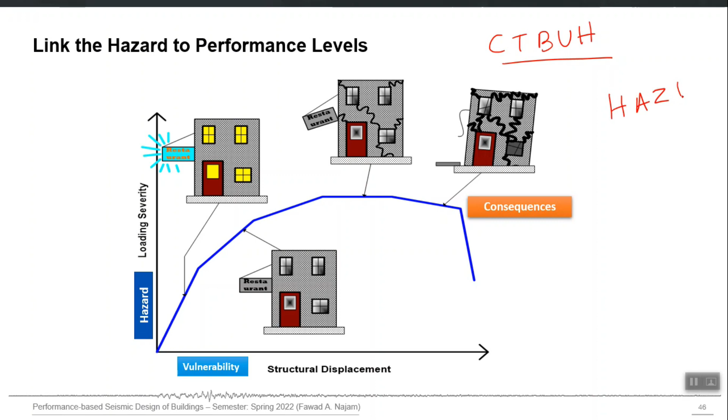You specifically mentioned HAZUS. HAZUS is a methodology and a tool to perform seismic loss estimation. Seismic loss estimation itself is a big area. Loss estimation means that, for example, if you create a particular earthquake scenario, that if tomorrow an earthquake of this magnitude or this PGA level occurs in this city, what is the expected loss?

So you actually calculate how much will be the repair cost for all structures, how much will be the downtime, how much casualties, how many people will be injured. All these social and economic losses can be quantified, and this whole process comes under the seismic loss estimation umbrella. HAZUS is one of the tools which can perform this seismic loss estimation.

It is integrated with the GIS system, where you model all the buildings of the whole city, the exact population, and all the essential and non-essential facilities, and then you create an earthquake scenario. As a result of that earthquake, the program computes what the damage will be. So I am not familiar with how HAZUS classifies different buildings.

For the purpose of loss estimation, it classifies based on different categories, like the material from which buildings are made, and based on their structural system, for example masonry, RC, confined masonry, etc.

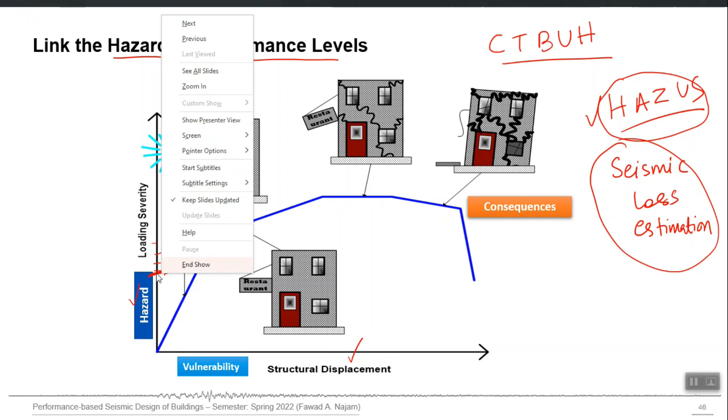We get a curve like this: the building remains linear elastic up till a certain level of hazard, so displacement increases linearly. But if we increase PGA or hazard level beyond that, the building's displacement no longer follows a linear trend, and at a certain level the displacement keeps increasing indefinitely with very little increase in loading severity. This is the maximum loading the structure can sustain, beyond which the structure becomes unstable or unsafe—it is no longer functional.

This kind of curve can be obtained if we perform dynamic analysis at different levels of loading severity, or against earthquakes having different PGA levels. We get these points and plot this blue curve explicitly using nonlinear dynamic analysis. If we use a linear structural model, it will always follow the straight line forever, but a nonlinear model has the capability to capture this complete nonlinear trend.

This kind of figure explicitly relates the hazard level with the building performance. You can directly say that if an earthquake of this much level occurs tomorrow, you can expect some nonlinear effect, or if an earthquake of this level occurs, the building will remain intact. So you are relating hazard to performance directly using a nonlinear analysis.

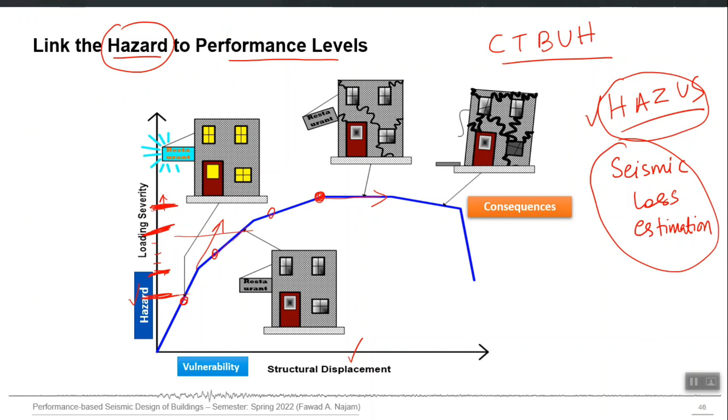And this performance can then be converted into any other loss. For example, the performance can be linked to other indicators—damage or loss is directly observable, such as cracking, yielding, or crushing of different elements. But you can also calculate the number of casualties expected at different earthquake levels, since your performance objective can be set in terms of casualties. The owner or client may express their performance objective in terms of downtime for rehabilitation, which is related to economic loss—if a business center or commercial activity is discontinued after an earthquake, you have economic consequences. So on this axis, all other losses—rehabilitation cost, retrofitting consequences, or impact on community sustainability—can also be related to building performance.

As I mentioned earlier, there are models available which can convert the building performance into any of these losses, and ultimately you can answer some of the questions explicitly asked of you as a structural engineer—for example, how much repair cost will be there in case of a particular earthquake, you can exactly calculate.

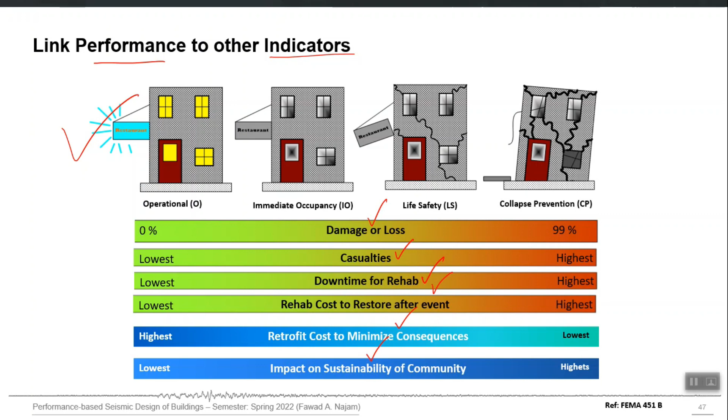So as I have said earlier, this methodology is primarily developed for seismic loadings, but any other loading can follow this idea. The idea is simple: someone, an important stakeholder of the whole process, sets a requirement, and all you have to do is follow that requirement to fulfill it. You are allowed to perform any analysis, you are allowed to use any standards, as long as you can justify them.

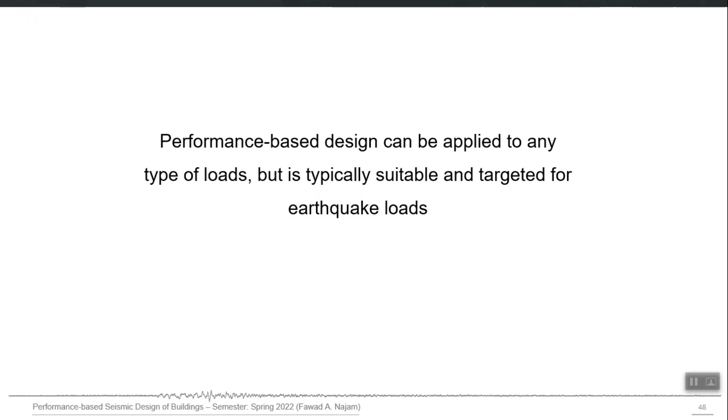It depends on the hazard level of that site. For example, in the north part of Pakistan, we know clearly that seismic hazard will govern the design. But in the southern part, depending upon the height of the building, wind loading can also govern the design. So in those cases you have to plot the story forces, wind loading forces and earthquake forces, and then compare them to see which will govern the design.

But there is one small issue in this case also. I am not sure I will be able to explain it clearly, but I'll give you a hint: the design philosophy against wind loading and the design philosophy against seismic loading are different. They have a very big difference, and that difference is that against the design level wind loading, we want our structure to completely remain elastic. No damage is permitted. We design based on this idea.

But in the design level earthquake loading, we intend to have some damage so that the design can be more economical. When I explain the code-based design, I will explain the source of that idea, that we allow some damage under the design level earthquakes, and we rely explicitly on the ductility of the building and overstrength, and we don't rely on these things in case of wind loading.

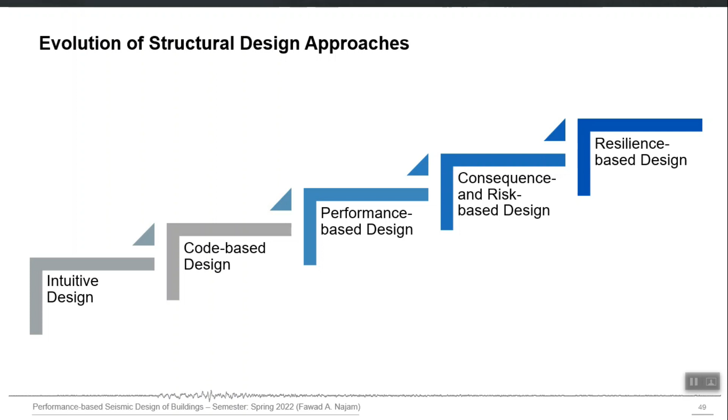Wind loading has far more coefficients and parameters compared to the empirical formula for seismic loading. Seismic loading is governed by 3-4 parameters maximum, but wind loading has more than 10, accounting for the height of the building, whether it's located in a valley or hill, wind velocity, and other factors. So overall wind loading is far more complex compared to seismic loading.

Let's see quickly some of the concepts we will be dealing with in performance based design, or mostly in this course. First, we will check building performance at more than one level. Building codes just prescribe the design procedure at only one level, the design level. But in PBD we will analyze our building for an earthquake level more than design and for an earthquake level less than design.

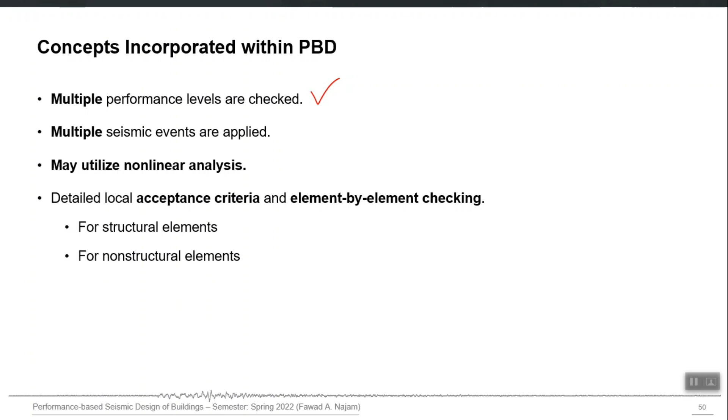Our expectation from the building response is different in both cases. For an earthquake level more than design, called the MCE level, maximum considered earthquake level, defined for buildings as an earthquake having a 2% probability of exceedance in 50 years. This is the definition of MCE level, an earthquake having a level higher than design basis earthquake. Design basis earthquake is generally defined as 10% probability of exceedance in 50 years. So if you reduce the probability of exceedance, the earthquake level is actually higher.

For MCE level, our expectation from the building is generally that it can undergo significant damage, but at least it should remain standing. It should not fall catastrophically. We call this performance level CP, collapse prevention - significant damage, but it should prevent complete collapse.

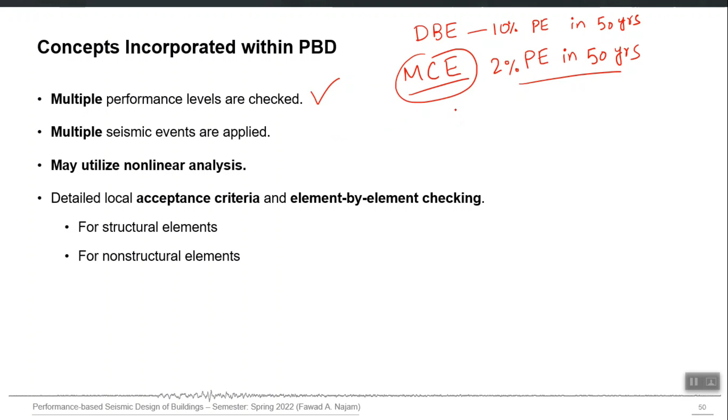Another earthquake level, lower than the design basis earthquake, we call SLE level, defined as an earthquake with 50% probability of exceedance in 30 years. It is a very frequent, low level earthquake, lower than the design level earthquake. Our expectation from the structure is that it will remain completely serviceable - hence service level earthquake. There can be some minor non-structural damage, but the building will remain completely functional. The performance level associated with SLE is called immediate occupancy, IO, meaning the building will be available for occupancy right after the earthquake.

Multiple performance levels are checked and multiple seismic events are applied - SLE and MCE level analysis - and these may utilize nonlinear analysis. For service level analysis, since our expectation is that the structure will remain completely linear, we may use a linear elastic model in most cases, which we also use for design level earthquake. But for the design level model, we assume certain things based on the building design code, for example the crack stiffness modifiers, etc.

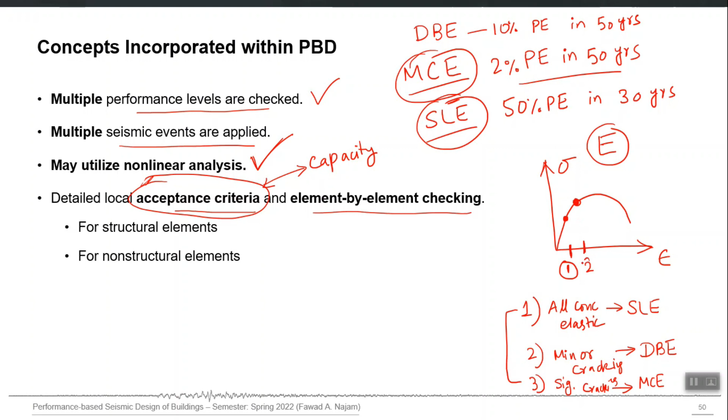Similarly, after point 1, the concrete starts getting softened - actually cracking started in compression - and let's say at this point some minor cracking has already occurred. So let me call this strain level corresponding to my performance objective 2. And I know that beyond this point concrete will collapse because this is the peak point, so no one will be wanting to be at any point on this declining curve. So the maximum point can be declared as the strain level corresponding to the third performance objective.

So now I have three numbers which are acceptable for me as a structural engineer because they are fulfilling the client's performance objective. I know that if I apply an SLE level earthquake to my structural model and any strain in any concrete goes beyond point number 1, performance objective is not met. So now I have some targets in terms of the required analysis results, or you can say the maximum level of deformation.

These maximum deformations which are acceptable are called acceptance criteria. As the name indicates, they are actually three different capacities: capacity corresponding to elastic, capacity corresponding to minor cracking, and capacity corresponding to significant cracking. They are capacities corresponding to the requirement set by the client, and they are in terms of deformations. For all the ductile components, they will be mostly in terms of deformations, so for material level, they are in terms of material strains.

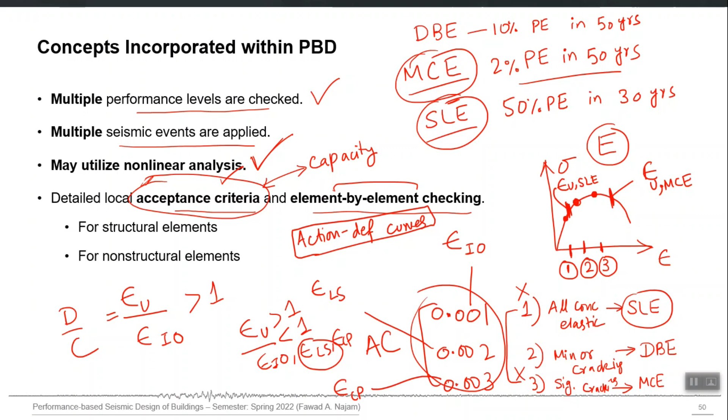And this can be extended to non-structural elements also. Non-structural elements can also be modeled in a structural model, and then their acceptance criteria can also be prescribed. Some of the non-structural elements are drift sensitive, some are acceleration sensitive. So their acceptance criteria is also in terms of drifts and acceleration.

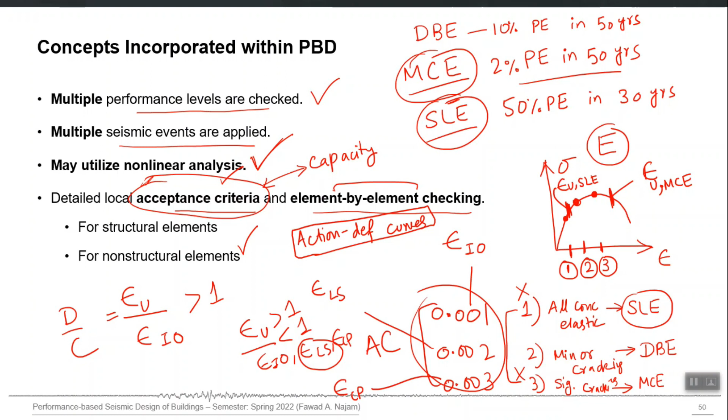So the definition of seismic hazard in PBD is probabilistic. This we have discussed in detail in the last session. So hazard is actually the intensity and characteristics of ground shaking that the design is developed to resist.

Previously it used to be deterministic, which means, for example, magnitude X earthquake on Y fault. For example, you have this site, and this is your, let's say, fault which is governing the seismic hazard at your site. The deterministic definition of seismic hazard is that you assume a maximum magnitude which this fault can develop, let's say magnitude 7, and you already know the distance between the fault and your site, let's call it R, and it is, let's say, 30 kilometers. Now using these two numbers, 30 and magnitude 7, you can calculate a maximum PGA which can be experienced at your site if this fault produces a magnitude 7 earthquake.

And there are relationships which can be used for this kind of prediction, and those relationships are called GMPEs, ground motion prediction equations. Previously they used to be called attenuation models. If you plot them graphically, they will look like this: distance R will be on the x-axis, and any ground motion parameter, let's say PGA, will be on the y-axis, and they will look like these lines for different magnitudes, let's say M6, M7, M8. So these kind of equations are available in abundance in literature. They are called GMPEs, ground motion prediction equations, or attenuation models also. So using these kind of relationships, you can simply say that magnitude 7, 30 kilometers, it will produce this much PGA at my site.

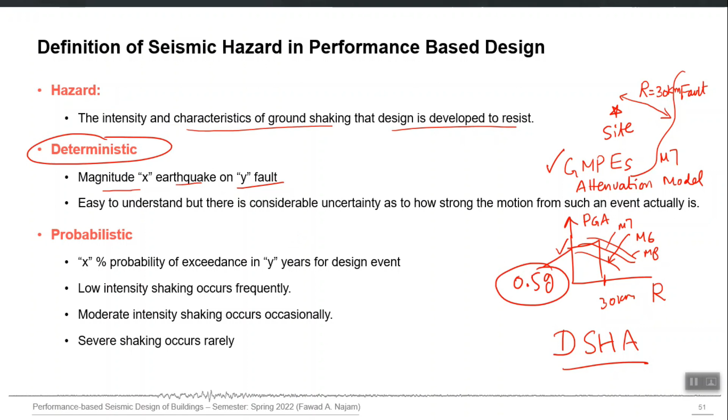So if you actually perform this process, it is called deterministic seismic hazard assessment, DSHA, that you directly calculate or estimate a peak PGA number or peak ground motion parameter which is expected at your site. No probability of exceedance, no information about whether this number will be exceeded in future or not. So one fixed number, magnitude X earthquake on Y fault. This process will give you a deterministic definition of hazard. So if, for example, I get a PGA of 0.5 G, this is a fixed number in DSHA. So no associated probability of exceedance.

On the other hand, we now have a probabilistic definition which doesn't have a fixed PGA. It depends on what probability of exceedance you want to define that PGA. So previously this deterministic definition was easy to understand, but there is considerable uncertainty on how strong the motion from such an event actually is. So you just consider the worst case scenario, closest fault, maximum magnitude which it can produce, and then predict the PGA number at your site based on these GMPEs.

In probabilistic definition, as discussed in the last session, we don't define PGA directly as a fixed number. We say there is an X% probability of exceedance in Y years, and based on this definition we get a PGA value. For example, we can say 10% probability of exceedance in 50 years gives a PGA of 0.5 G. But if we change it to 2% probability of exceedance in 50 years, the number will not be 0.5 G, it will be more than that.

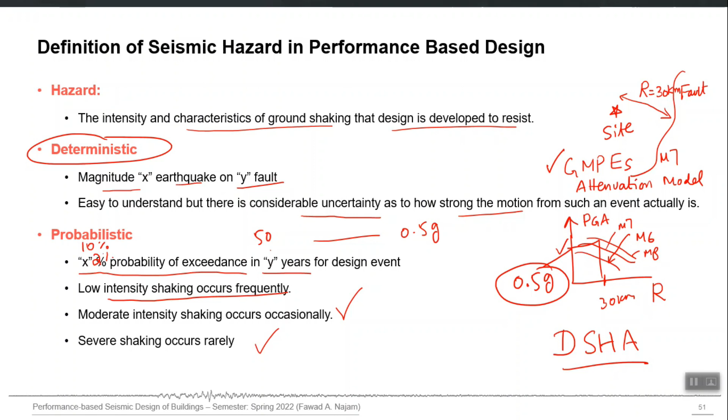So moderate intensity shaking occurs occasionally and severe shaking occurs rarely. So we now define different levels, not one fixed level but different levels. It is our choice - we offer different solutions at different levels of earthquake.

For example, if we opt to design our structure at SLE level, which is not a wise decision by the way, we are basing our design on a very frequent earthquake. This means there is a big chance that an earthquake more severe than this will occur in the design life, which your structure is not going to sustain because it is designed on a lower level. So the generally acceptable level of design earthquake is DBE level, which is 10% probability of exceedance in 50 years.

So we check each level separately, and our expectation from the structure at each level is separate and independent of the other. In order to pass the final design, all performance objectives should be satisfied. If there is even one performance objective that is not met, the design is not okay. So independently, the SLE level performance should be acceptable according to the performance objective you set. For DBE level, separately it should be acceptable, and for MCE level, separately it should be acceptable. Only when all three are acceptable do you finalize your design.

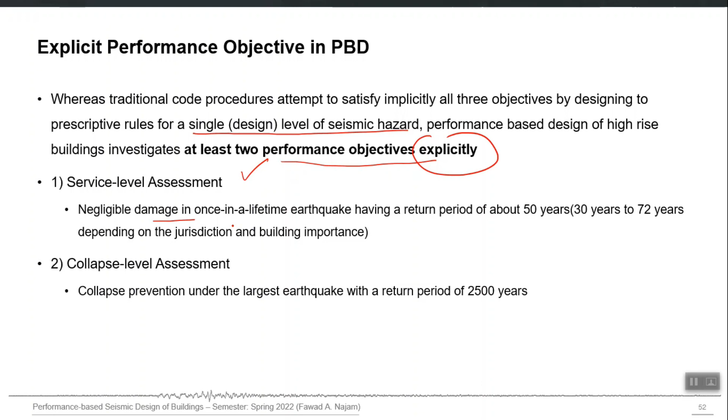Because it enables us to actually see the building performance at the design level. So one is service level assessment, and our expectation is that there will be negligible damage, and this is an earthquake which on average will come at least once in the design life of the building. So it has a return period of around 43 years - according to the latest guidelines, though different references may give a different number. A 43-year return period means that if you see this level of earthquake spread along history, on average this earthquake occurs every 43 years.

So return period doesn't mean that in the future 43 years it will definitely come - it is not necessary or mandatory that it will come once.

43 simply means that if you see this level of earthquake in history, say a hundred of these earthquakes over a span of thousands of years, if you divide that span by the number of earthquakes, you get 43. So on average this level of earthquake occurs every 43 years. But there's no guarantee it will occur in the next 43 years. Two such events could even occur on the same day. It's just a number associated with previous data.

So collapse level assessment, or MCE level assessment, is generally performed for the MCE level earthquake, and the return period for MCE level is 2475 years exactly, sometimes rounded to 2500 years. This is a very rare earthquake, occurring on average every 2500 years. You would be very unlucky if this occurred during the design life of your building. Therefore we allow significant damage, since there's very little chance it will occur in the design life. So we associate the CP performance level with this MCE level—CP means significant damage is allowed, but the building should remain standing.

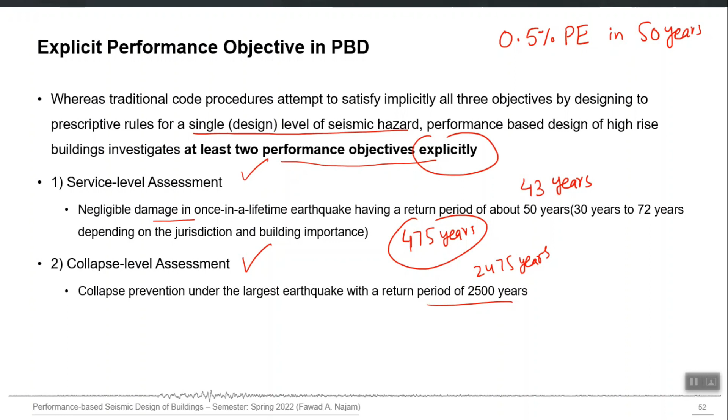But this definition is for buildings only. As I explained earlier, if you want to design a bridge, you will not design for the DBE level of buildings. The DBE level for bridges is a 1000 year return period—so it's a different level of earthquake than for buildings. Similarly for dams, DBE is a different earthquake level, sometimes defined as an earthquake with 0.5% probability of exceedance in 50 years. I think this corresponds to maybe thousands of years return period—this number can be converted into return period, I'll explain later. So dams are designed for 3000, 5000, or 10,000 years return period, depending on the guideline used.

So code level is somewhere in between service level and collapse level. We have negligible damage at frequent hazards and significant damage under extreme hazards—CP level at extreme hazard. So code is somewhere here, in between, but it doesn't provide an explicit check.

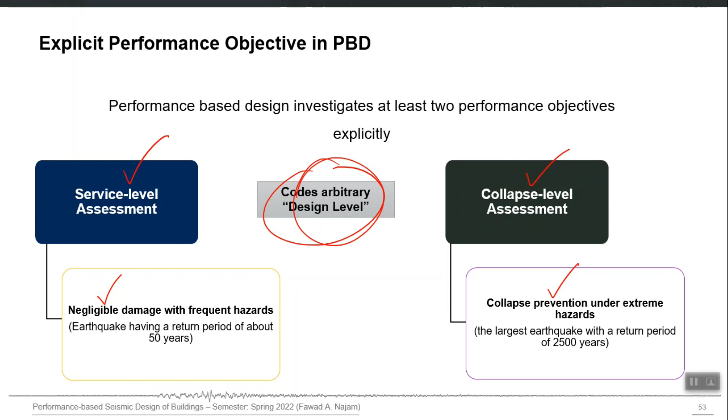So this is now a summary. 50% probability of exceedance in 30 years corresponds to a 43 year return period. This is the serviceability performance objective associated with it—minor damage to structural and non-structural elements.

DBE level, 475 year return period, moderate damage—this is the code level. So whenever the code prescribes a PGA number, by default it is DBE level.

Maximum considered earthquake, 2% probability of exceedance in 50 years, corresponding to a 2475 year return period—collapse prevention performance level. Extensive damage is allowed, repairs may be required and sometimes may not be economically feasible, but the structure should remain standing, no collapse.

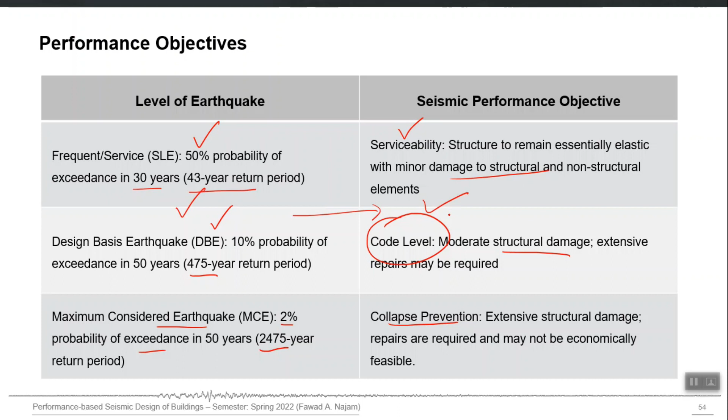But there can be different intermediate levels also—this is just one template which I give you. There can be some intermediate hazard level and a corresponding requirement at that level, so there can be more than three performance objectives.

So for the PBD process, first earthquake hazards must be defined clearly, because they are different than DBE now. For PBD to be successful, both the client and engineer must be satisfied. The engineer requires that hazard is quantifiable and performance is quantifiable—he should make sure whatever the client's requirement is, it can be converted into numbers which form the acceptance criteria, so that after analysis he can explicitly check whether those numbers have been achieved.

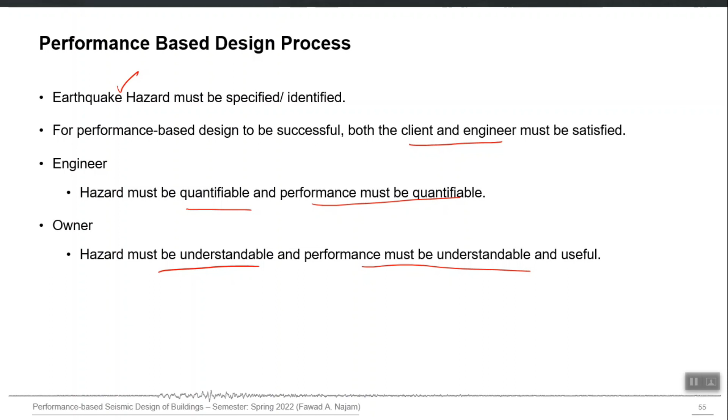For the owner, hazard must be understandable and performance must be understandable. This is the challenge for the structural engineer now—he has to convert the hazard definition into something understandable, and similarly the performance should also be understandable for the owner. So he will not report the acceptance criteria to the owner, he will report the building performance. He will not say all the strains in concrete are less than 0.001, he will say the building is completely occupiable after an earthquake—converting acceptance criteria into performance. Similarly for hazard definition, he will not state probability of exceedance in a given number of years, he will simply say a rare earthquake, a frequent earthquake, or a design level earthquake. So he converts hazard definitions into understandable terms, and these IO, LS, and CP levels are actually attempts to make performance more understandable.

That's how it works in most other parts of the world. Real estate developers carry out performance based design for their buildings and get a certificate for PBD, so with more confidence and surety we can say that building will be safe. Now he will sell that building or those apartments maybe 5-10% costlier than the conventional developer, saying this building is checked for advanced level safety analysis and declared safe for future earthquakes. So the owners will be happy to pay more if given this surety. The developer is happy, the PBD expert is happy, and the owner is happy because he has more confidence now. It's a win-win situation everywhere.

So when I say client, I don't mean one single person who just wants his building constructed. Performance based design is something beyond building code, so you require people who have the desire to go beyond the building code, unless the authority having jurisdiction explicitly prescribes that you should go through this PBD process. Other than that, it's all about being more confident about the seismic safety of your building. So when I mean client, I mean any stakeholder who wants additional information or additional confidence on the seismic safety of his building. So any decision maker, stakeholder or client - it can be a single building owner, but mostly it is real estate developers or developers of high rise buildings.

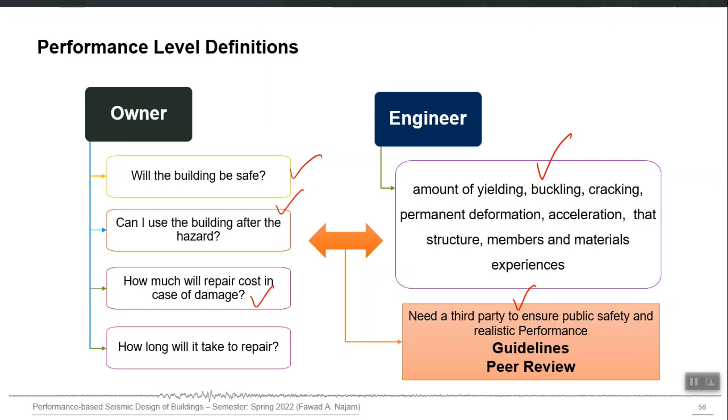This has to do with some overall conceptual development of the design practice in a particular area. Generally, one of the motivations of performance based design is that it can result in cost effective design, mostly for high rise buildings.

Let me give you an example. Let's say you design a building to remain elastic at a PGA level of 0.5 G - this is the code based design where you ensure the building remains completely elastic. This isn't exactly true, but let's assume for the sake of argument that the building remains elastic up to 0.5 G, the DBE level. Now, is there a guarantee that 0.6 G will not occur in the design life of the building? No guarantee. So if 0.6 G occurs tomorrow, how is this design, which is meant to remain elastic up to 0.5 G, going to perform? Ideally this design is not effective for 0.6 G.